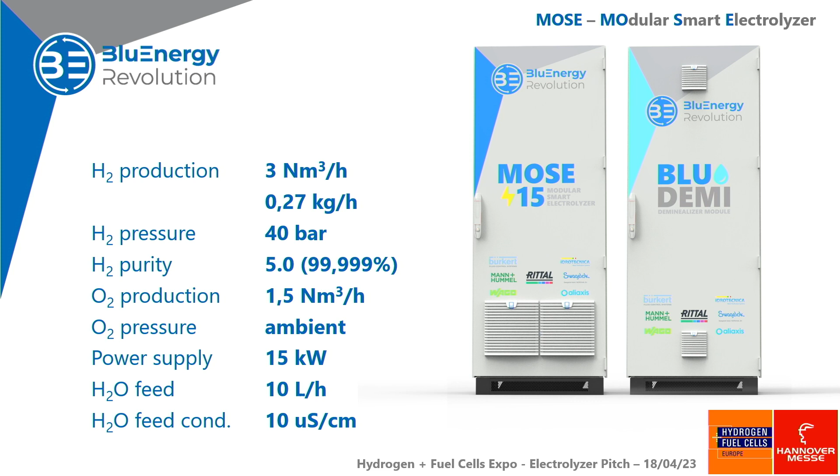So here you see our system. This is a very compact electrolyzer. It is a PEM electrolyzer, 40 bar of hydrogen pressure, slightly less than 0.3 kilograms per hour of production, and of course, pure hydrogen, 5.0, 99.999% purity. It comes out of our experience as system integrators. We dealt with projects in hydrogen generation, we gathered that experience and we came out with a product.

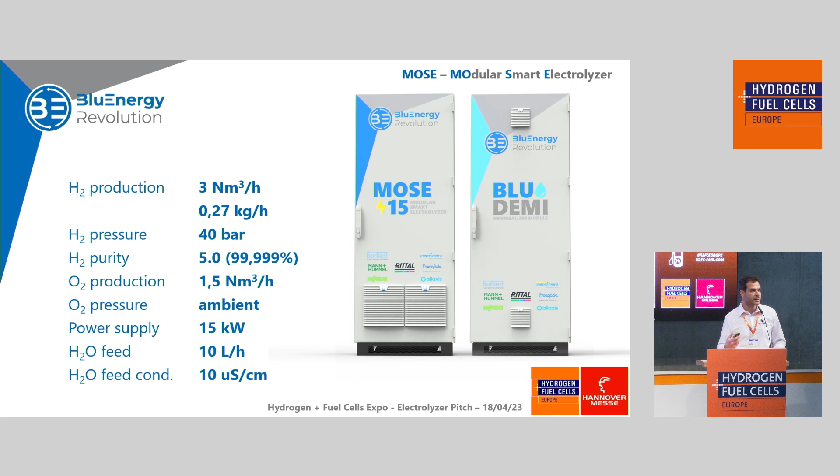Along with our MOSE, we have our Blu Demi, which is a demineralization unit. It serves to feed the electrolyzer with demi water. To make hydrogen, you need water. You split water and you make hydrogen.

Here is the concept of modularity. Mo stands for modular, okay? So you can couple electrolyzers one next to each other, combine gas flows, combine hydrogen delivery, and have one bigger electrolyzer. The range is from 15 to 75 kilowatt, from 3 to 15 normal cubic meters per hour of hydrogen production. If you want to go bigger, this product is not for you.

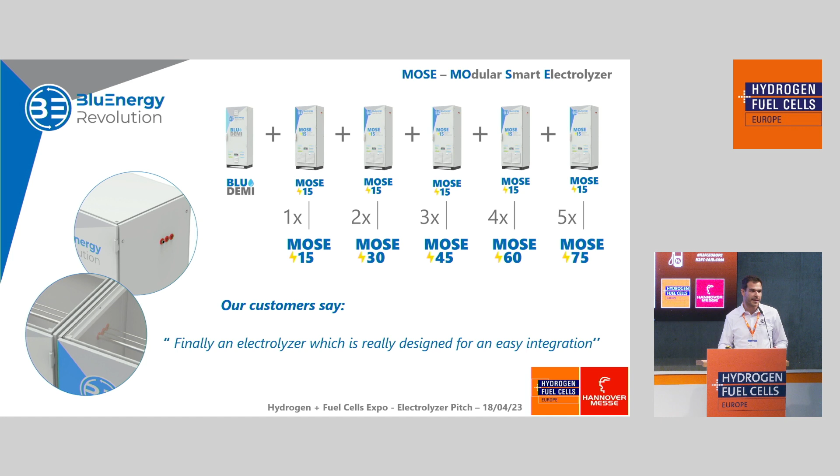We target a specific size, this small size, for many applications, from industrial to residential ones. Here you see how they couple to each other. You will have one single hydrogen delivery, vent from the electrolyzers, and our products are designed to be maintenance friendly, easy to integrate, easy to connect, and simple to maintain.

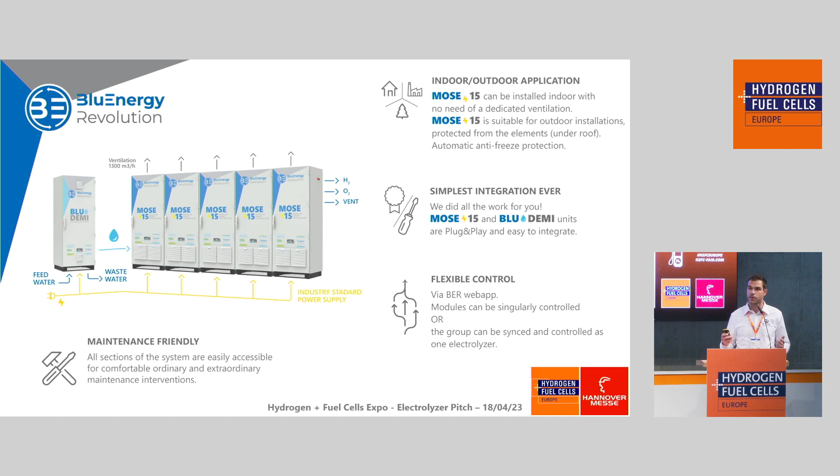Flexible control, S stands for smart. So we control it by web app, and we can control the system by remote, fully by remote, and gather the data. Here you see we collect all the data, and we provide the customer predictive maintenance. That's our idea, to serve our customers with our experience in hydrogen technologies.

We shine with components, so our experience is in the selection of components, not in the design of the technology. We are not the manufacturers of the stack. What we put together is a custom product, competitive, and very compact and safe.

Here you can see some of the names of the industrial partners who supported us with high quality components. We are newcomers. How can we prove to you that our product is a good product with high quality components?

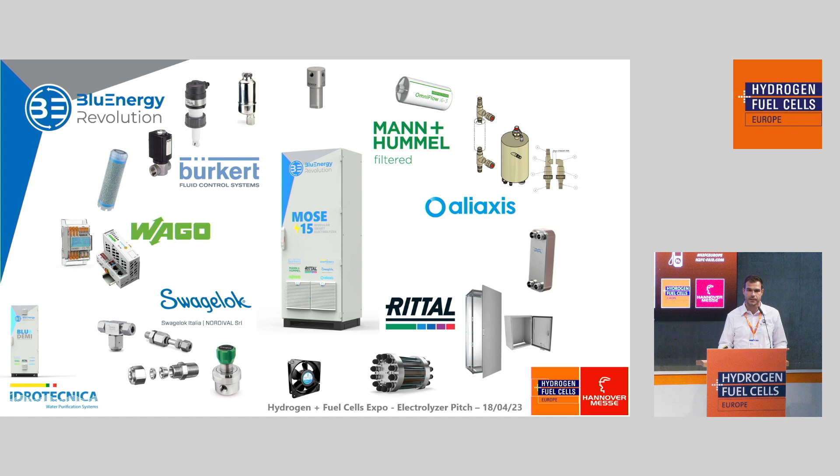Please visit us at stand D37, just right there, to view with your own eyes our product. And please let me thank our partners for supporting us at this fair at Hannover Messe.

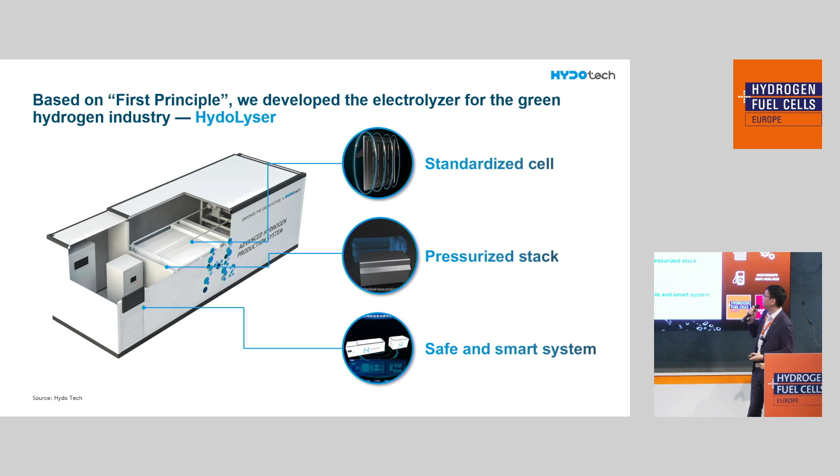And also at the system level, we make it smart and safe. So what does that mean?

By standardizing the cell, you can see this is a real picture from one of our projects. It's totally different from other products, which are round shaped. We do it in a rectangle shape, and we redesigned each cell and optimized it to the upper limit of efficiency, safety, and intelligence, so that it's very easy to scale up because they are all the same.

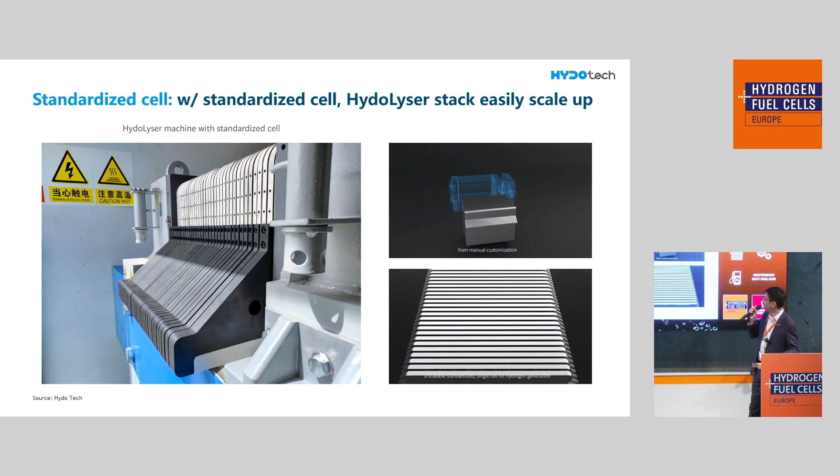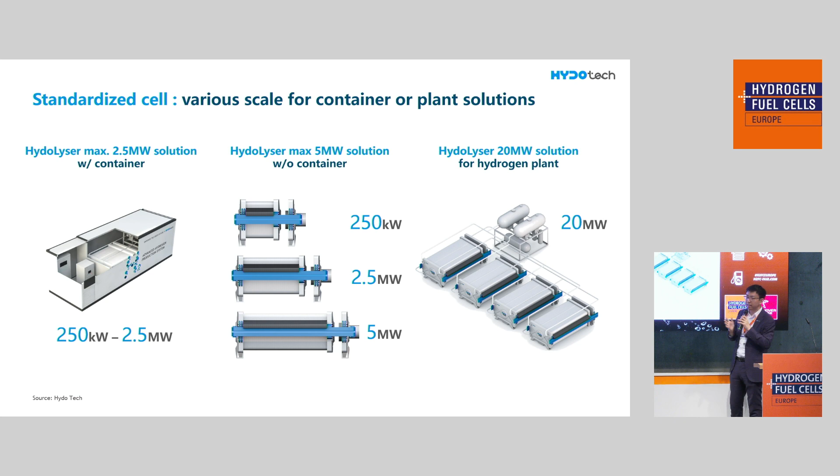So not only for containers, but also without containers or even at plant level, we can easily scale up with exactly the same cells. This is the cell level. By standardizing it, it will be very cost effective when we go to massive production. This is how we see the cell level.

At the stack level, we see the alkaline electrolyzer can be categorized in two dimensions. The first is whether it's standardized or customized, which I already discussed. The other dimension is whether it's pressurized. Why do we want pressurized?

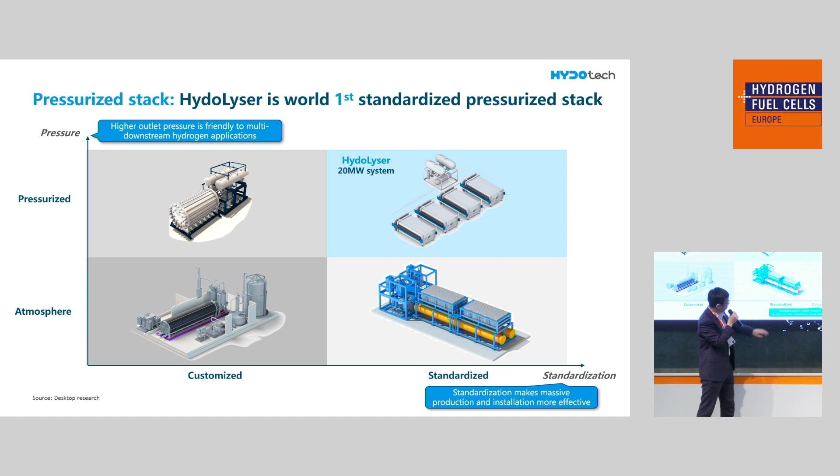It's because pressurized will be more beneficial for downstream applications. We are basically the only one doing standardized and pressurized alkaline electrolyzers now. It's already used in several downstream applications.

For example, what I mentioned, distributed energy systems, it's already in operation. And also in transportation systems, fuel cell vehicles need very high pressure hydrogen. So our pressurized electrolyzer output could already save one or two compressors for our end customers.

It's also very user-friendly to the chemical industry. As we know, the chemical industry has massive plants consuming tons of hydrogen a day. Our product, our solution, will provide pressurized hydrogen that can be directly used for them to produce ammonia. This is already being built and will be in operation by next year.

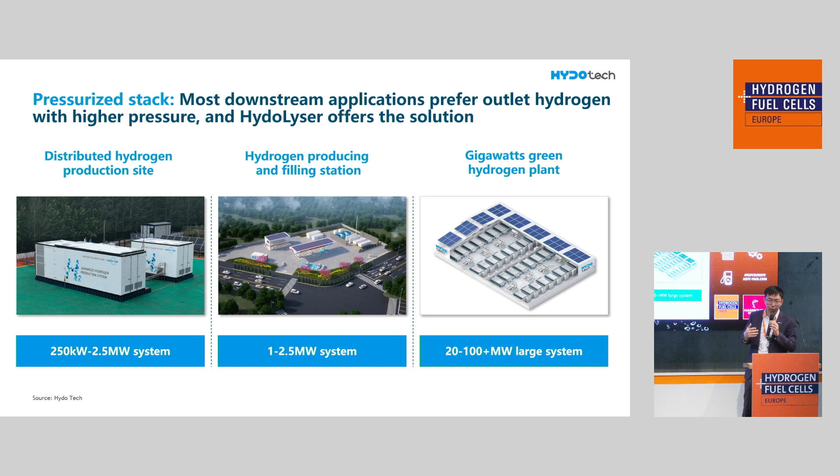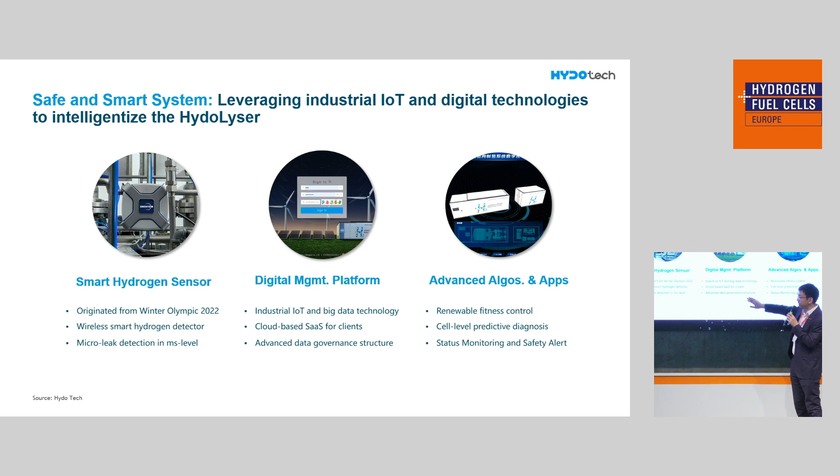And last but not least, the system: safe and smart, I won't discuss more. Basically, we've added intelligent sensors, digital management, and advanced algorithms to ensure our system is able to better fit the green electricity, the renewable electricity, regardless of its unsteadiness during operation.

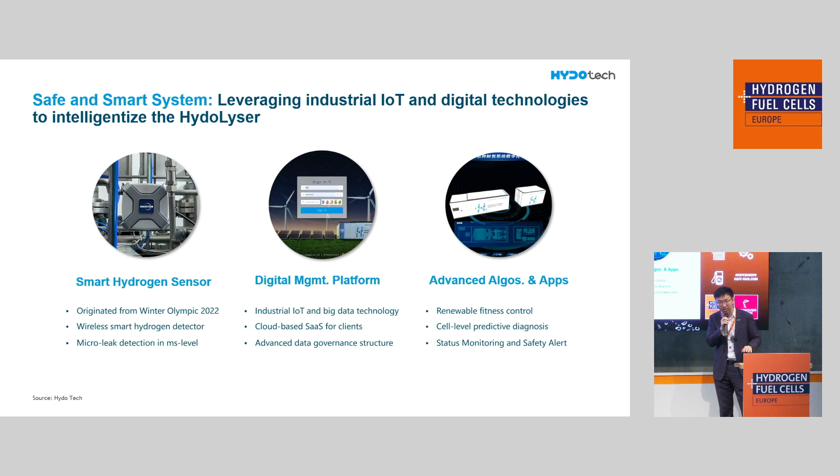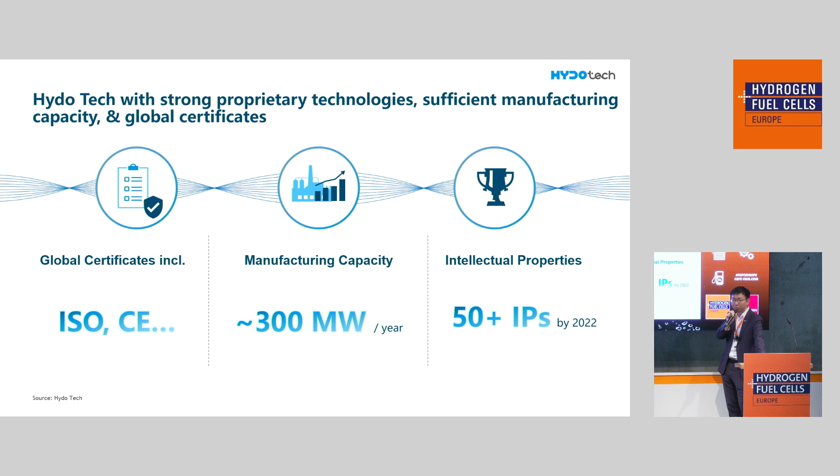So that's all about our product. About our company, we are already very ready to launch into the global market, from the certification level, our manufacturing capacity, and all the key technologies I mentioned. We fully own our own intellectual properties.

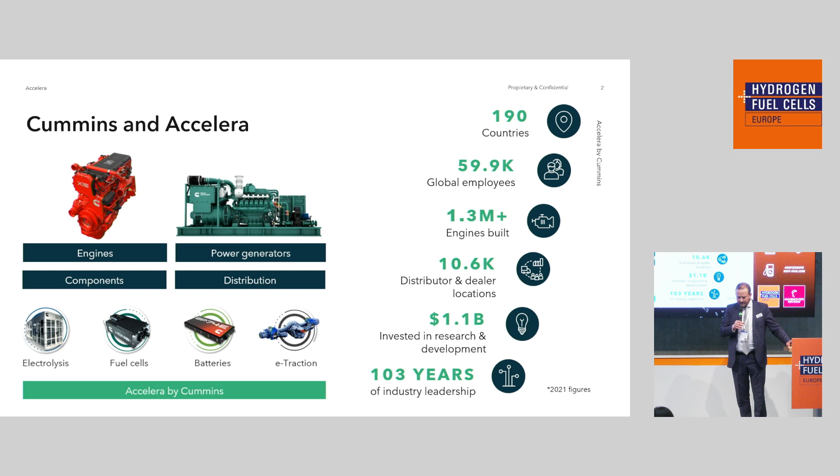In terms of electrolyzer offering, we've been in that space for more than 70 years through the acquisition of Hydrogenics, which was done in 2019. And here is our current product offering.

So we have a mix of products between alkaline and PEM technology. We use alkaline mainly for small-scale systems, so containerized solutions with all the balance of plant directly attached to the product - that's a plug-and-play type of system. And then when we start above like 2 megawatts, we offer a containerized PEM system, which is based on a cell stack of 1.25 megawatts of input power.

That's an indoor product that needs to be integrated by EPC companies, integrators, etc. And so in that case, we have developed the HyLYZER 1000, for which we already have a unit in operation for more than 2 years in Canada at the site of Air Liquide, where the hydrogen is being liquefied for industrial customers. There we use a stack of 2.5 megawatts.

We are releasing this year the HyLYZER 5000, which is a 25 megawatt building block, again using this 2.5 megawatt cell stack. We have secured a first project in Canada in the size of 90 megawatts with that project, which will be delivered in 2025.

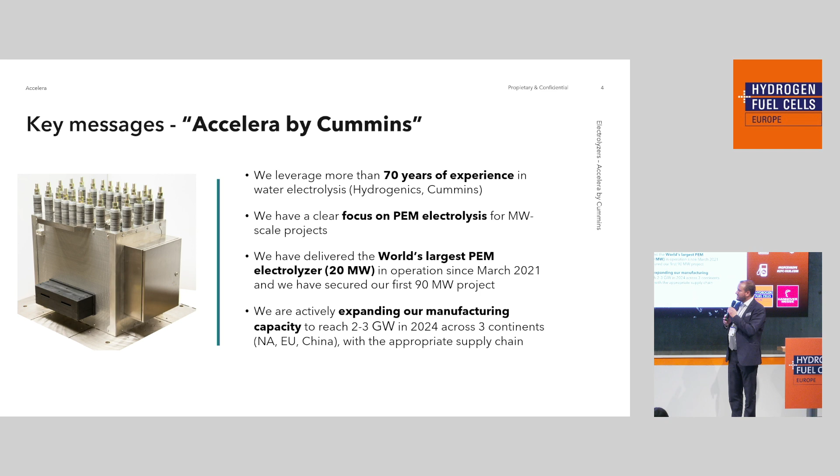And we had the pleasure to host President Biden in one of our factories in the US 2 weeks ago, and I hope my presentation was interesting for you. Thank you very much.

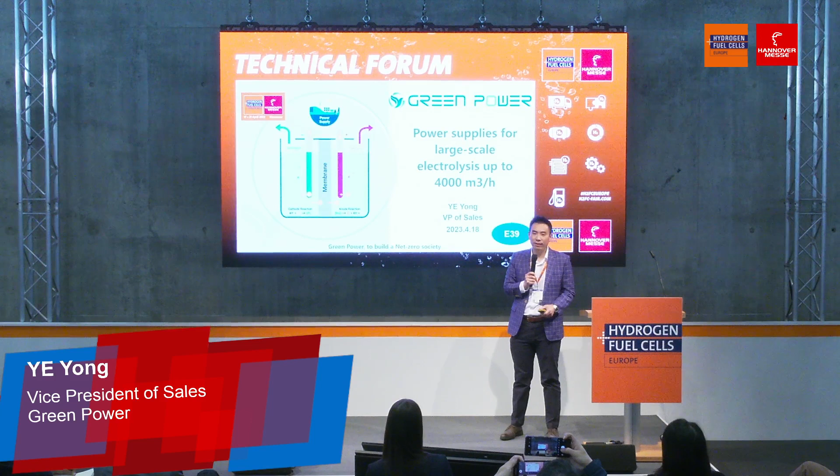I'm Yong from Green Power, a manufacturer of electrolyzers and a system integrator of green hydrogen production. I'm so excited to be here today because we have been here since 2019, but today we finally made it.

Today we are here to talk about green hydrogen, and when we talk about the future of green hydrogen, we have to consider the cost of producing green hydrogen versus other hydrogen, black, grey, or blue, etc. So every penny counts.

People are concerned about the cost of electrolyzers, of course. But if we look at this picture, if we look at the whole process, we should not ignore the efficiency of the power supply, which directly determines how much power generated will be used to produce hydrogen.

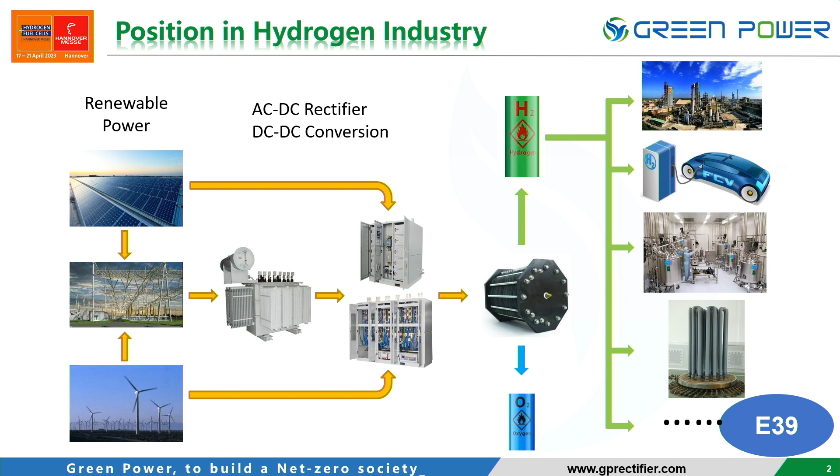Just for example, if you are running a 1,000 cubic meter per hour or 5 megawatt electrolyzer, just 1% reduction in the efficiency of the power supply unit will cost you an actual 24,000 euro each year. That's a brand new Audi Q2 SUV. What if you are running a 50 megawatt plant? That's a lot of money.

Depending on the source of electricity, different kinds of power supply units are used. Typically, solar power and wind power will be transmitted through the grid, which is also the simplest scenario. An AC/DC rectifier can handle the job.

Nowadays, the end user prefers to connect the solar and the electrolyzer directly, or the wind and the electrolyzer directly. So a DC-DC converter or an AC/DC without the transformer will be used.

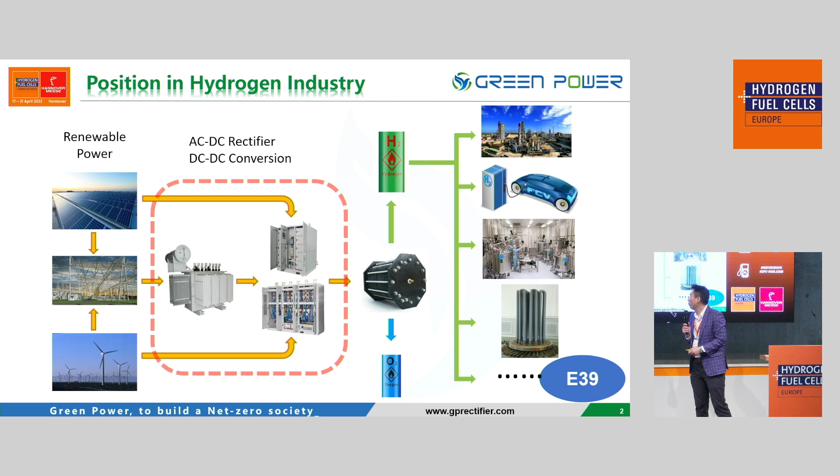And under a more complex scenario, when using multiple energy sources, such as combining solar and grid, or even solar, wind, and grid, an integrated power system will be used.

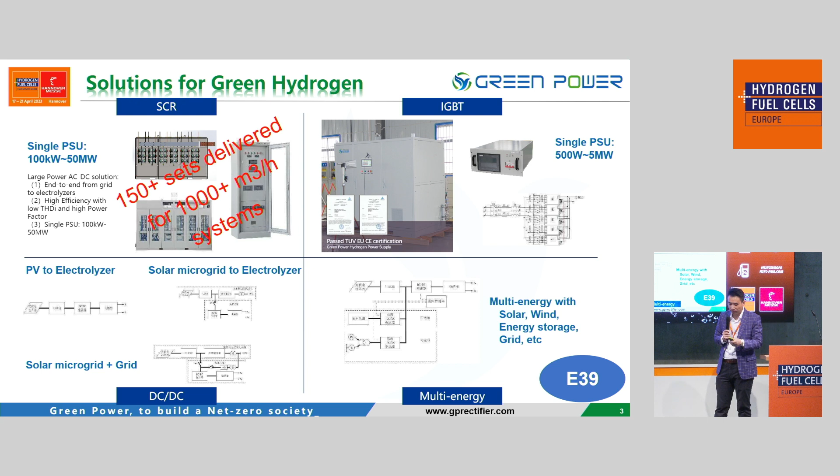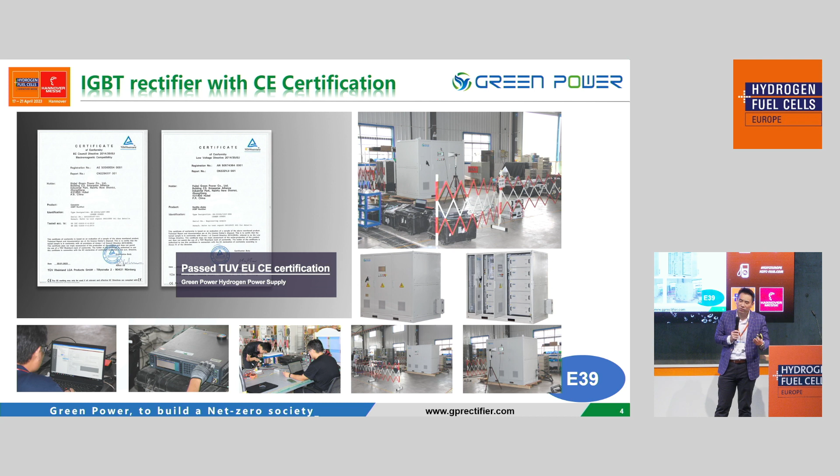In addition to different types of power supply units, there are a lot of other parameters which will affect the total cost of the power supply unit, such as the efficiency, power factor, total harmonic distortion, current ripple, etc. And in most cases, the end user has a very limited space for the PSU, so the size matters.

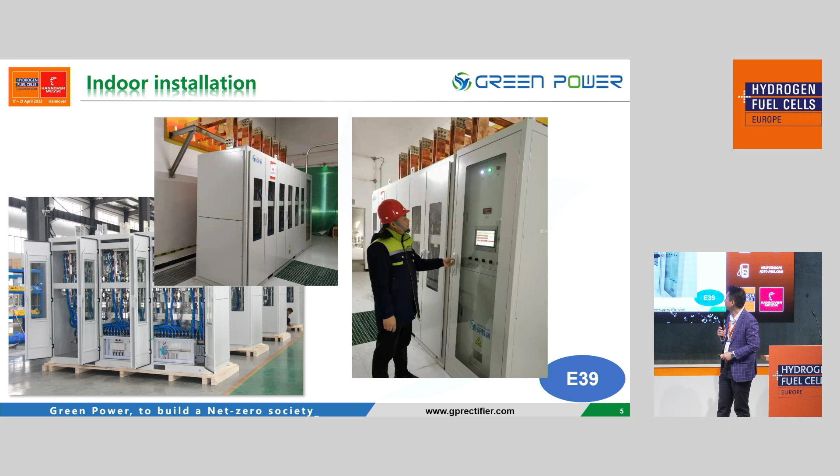Well, it's very difficult to complete optimization of the power supply system in 3 minutes. So welcome to our stand, we can have an in-depth discussion there. That's E39. Thank you, I'm Yong from Green Power.

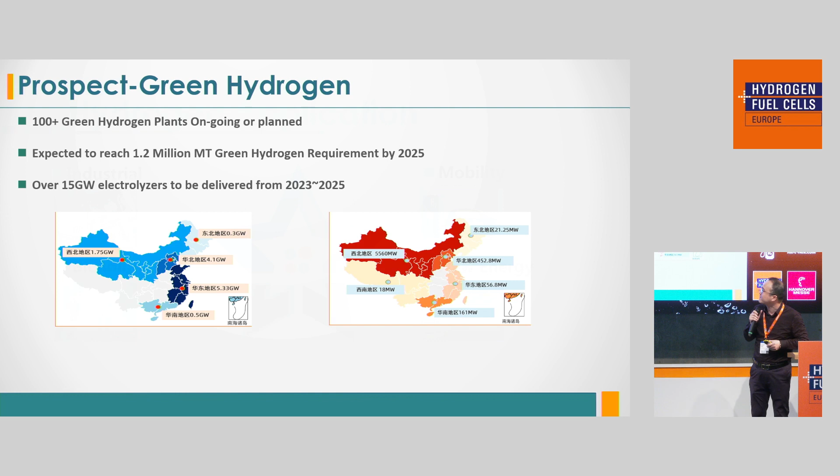Of course, this green hydrogen generated will be applied in various applications like industrial, blending with natural gas, mobility, and most important, as an element of energy storage related to renewable power.

So who are we? We are a manufacturer and a total solution provider specialized in green hydrogen. Not only in the hydrogen industry, we're also capable of providing our green nitrogen solution to collaborate with green hydrogen for green ammonia generation. We have our business sales footprint across the world, and we hope to have our first jointly developed stack installed in Germany soon, this August.

So we are capable of providing different solutions for hydrogen generation, including alkaline, PEM, SOEC, and AEM. Currently we have our alkaline and PEM on stream, and I hope our team's work on SOEC and AEM will come in a very short time.

We are specialized in the alkaline electrolyzer with a range from 2.5 kilowatts to 5 megawatts single stack with the latest technology, adding value for customers through high efficiency and low power consumption, and with a modular and compact design for the balance of plant. More important, we have in-house fabrication with 4 lines for the bipolar plates, which ensures in-time delivery of the system for our customers.

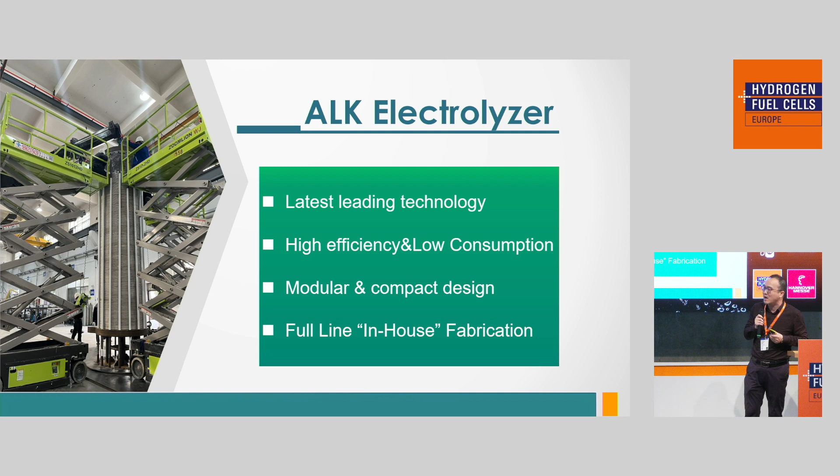For PEM electrolyzers, our team has done a great job with the new type ordered MEA, which can increase the electrolysis efficiency as well as the lifetime of the stack, and a unique micro-hole diffusion layer, which has less requirement of the CCM. The PVD catalyst sputtering technology precisely controls the catalyst usage and dramatically saves the amount of catalyst, which is a very key element of the cost.

We have our existing plants delivered around the world, and we have references in Europe, in the Netherlands, in Bulgaria, and in Italy soon. We will have our R&D center in Italy in a very short time.

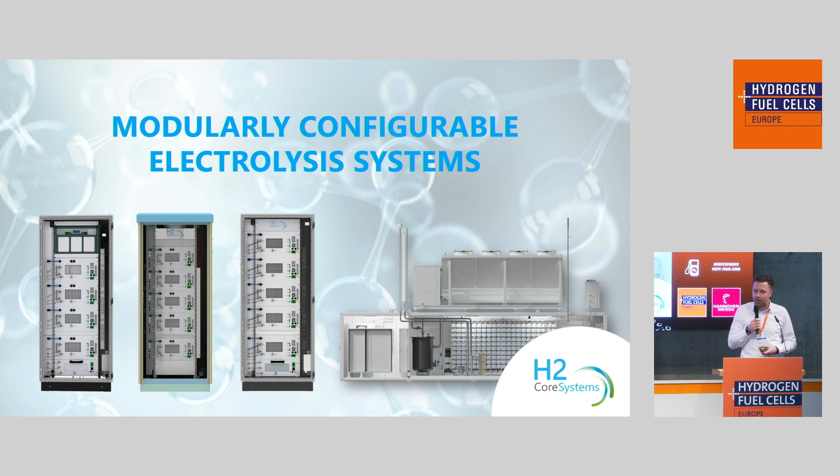The main goal we want to achieve is speeding up energy transition. This is our heartfelt goal, and we are completely convinced that we can only do it by teaming up with partners globally. That's why we, as a relatively small startup that started 2.5 years ago, already realized more than 200 hydrogen projects in more than 40 countries all over the world, teaming up with global partnerships.

So, it's very slow, but it's hopefully working. Next slide should be coming in a few seconds.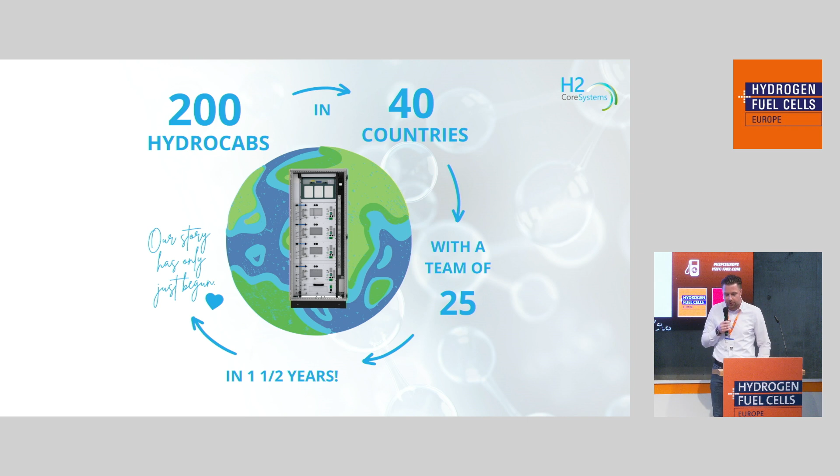Only with those partners can we realize global projects in a very quick manner, because we see ourselves as a workshop for our global engineering partners or our local partners who take care of the customer needs, and we produce in series the systems they need for their projects. In this way of working, we see a huge advantage to speed up energy transition, because everybody can concentrate on his own priorities and doesn't need to build up a whole complete production process on his own. But his knowledge about the local markets is needed, and that's what we can deliver.

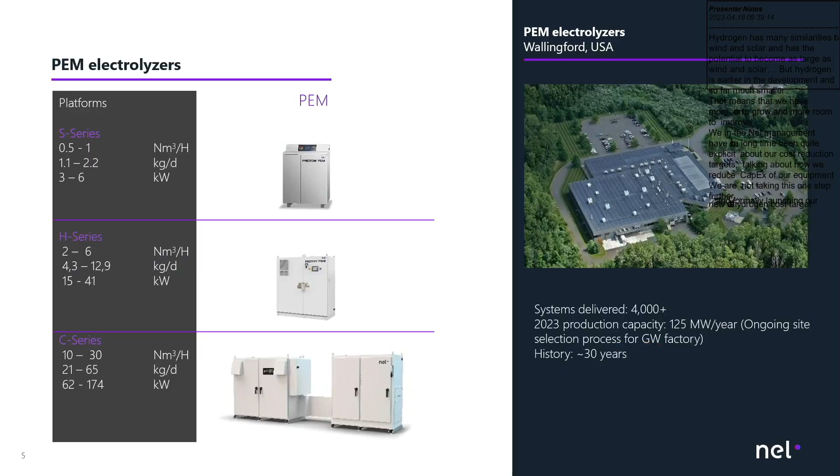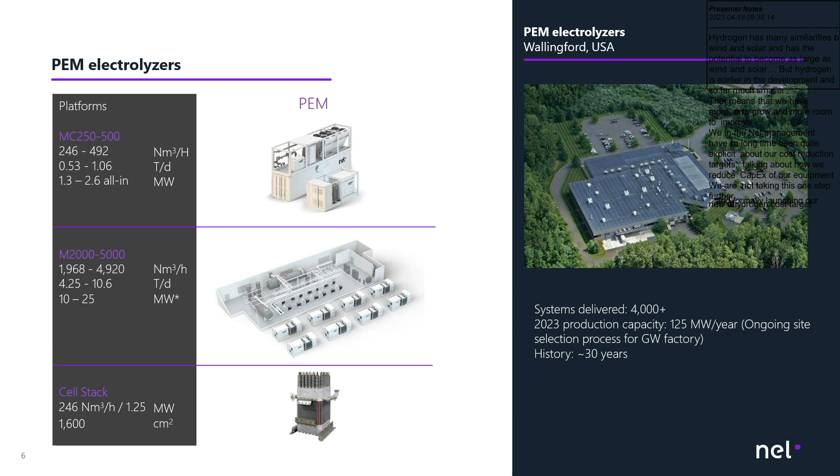So, there we go. What you're seeing here is our PEM electrolyzers. Normally at Nel, we are talking about alkaline gigawatt projects. But the PEM electrolyzer is also changing now. It's getting more efficient, it's very reliable, and it's also very competitive.

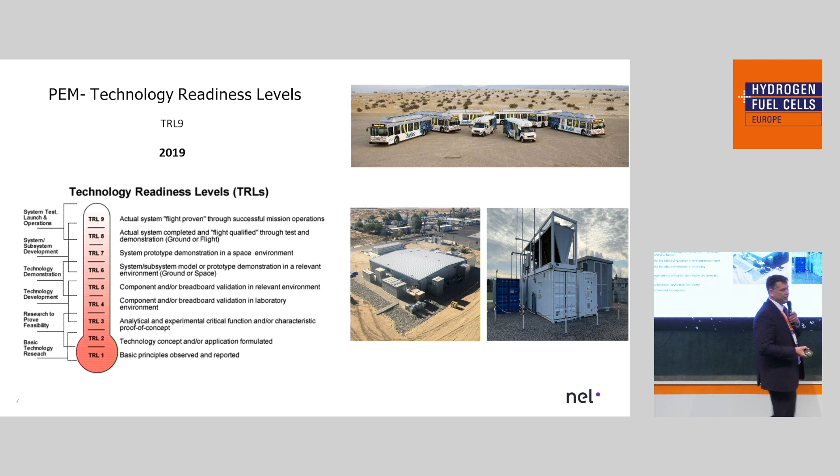Where we are with the development, TRL9 for the PEM electrolyzer was 2019. But this is not the most important. This is the journey. How do we actually come to this figure? How are we ready for this technology? And how can we secure your investment? I just want to open up a little bit about the journey.

The stack and the membrane we are using today, we started testing that in 2003 with real tests. And we found out the stack was not performing well. So we developed a new stack, tested that in 2005, and after 40,000 hours of real testing, we concluded 0 degradation. Degradation is not something people want to talk so much about, but we are very proud of this result. And we have also collected a lot of hours.

The question we always get: alkaline is better, it's more reliable and it has a long lifetime. But today, the PEM electrolyzer can actually run up to 85,000 hours. And we have an electrolyzer in the market that has reached it at 30 bar, with minimum degradation.

How do we scale it up? Because this is proven technology, and now we want to go into the 100 megawatt projects. So we signed an agreement with GM to reduce our price and increase the quality further. And the result of that is now we are on the map. Everybody is talking about the $2 per kilo of hydrogen, and we are actually there.

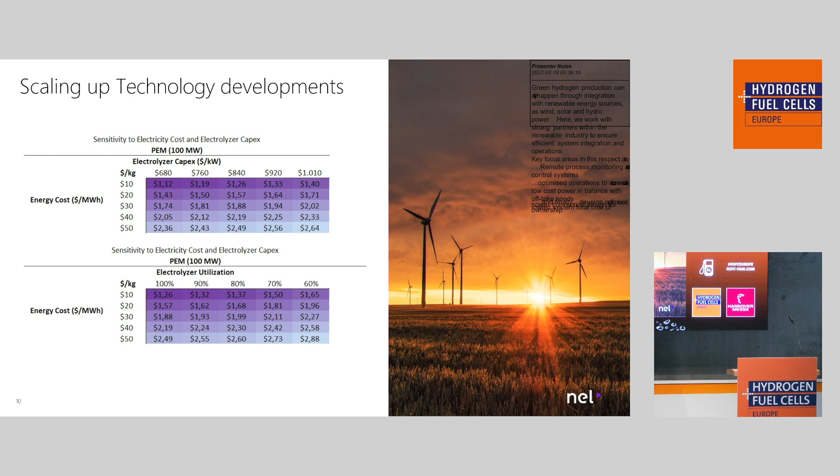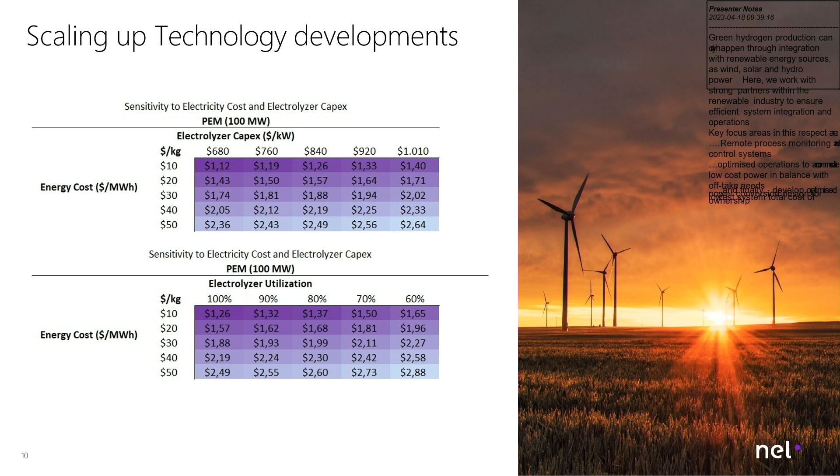What I have tried to do is to make a matrix where we have the energy price from wind farms, PV, hydro, and then we have your capital investment. So we are very proud to say the PEM technology belongs in the 100 megawatts, and we are below the $2 per kilo.

The most important thing is safety and reliability. Because if you don't prioritize these two things, you don't have a good project. So safety and reliability, then efficiency, and then the price, not the other way around. So both technologies are proven, and they have their benefits in green hydrogen.

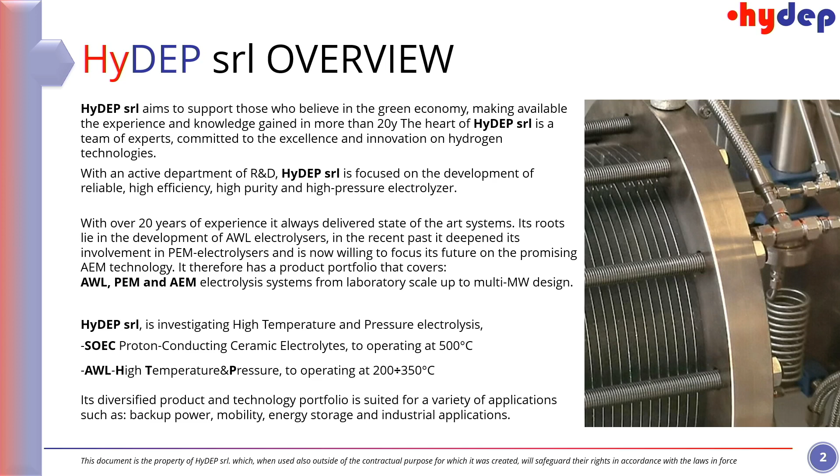Do you hear me? Yeah. I'm Mario Dragoni. I'm the CTO of HYDEP. HYDEP is a company we founded more or less 24 years back. We are specialized in design of the BOP, design of the stack, and design also of the plant. So now we are looking to improve our experience in new projects. The target is reducing the cost.

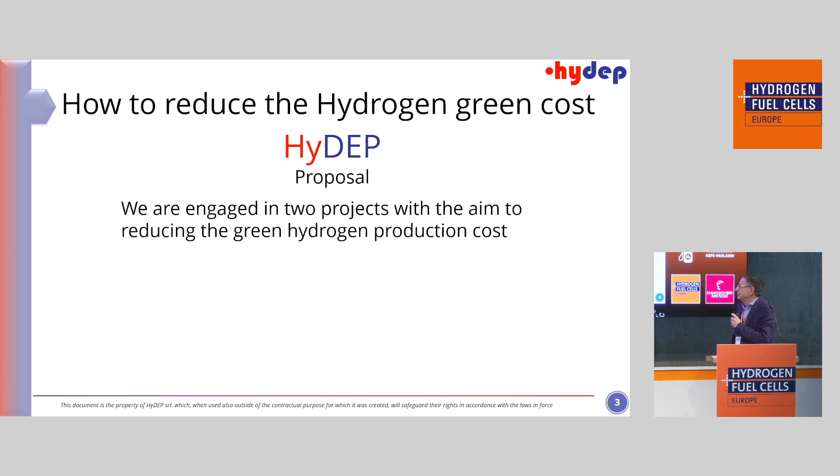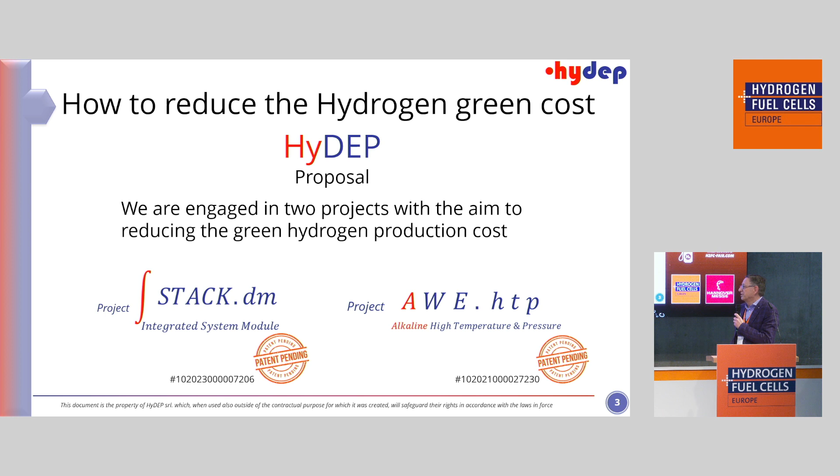Our approach is a little bit different than the market. We are looking to reduce the cost by integrating system modules. This is a new approach, and we are waiting for the patent in the coming months. And the next is the alkaline water electrolyzer, high temperature and pressure. These are two ways to save money.

Generally speaking, the cost for production is more or less 70% in power, 20% in CapEx and 10% in OpEx. And our proposal is to reduce the cost in CapEx, integrating in the stack many functions we have around the stack.

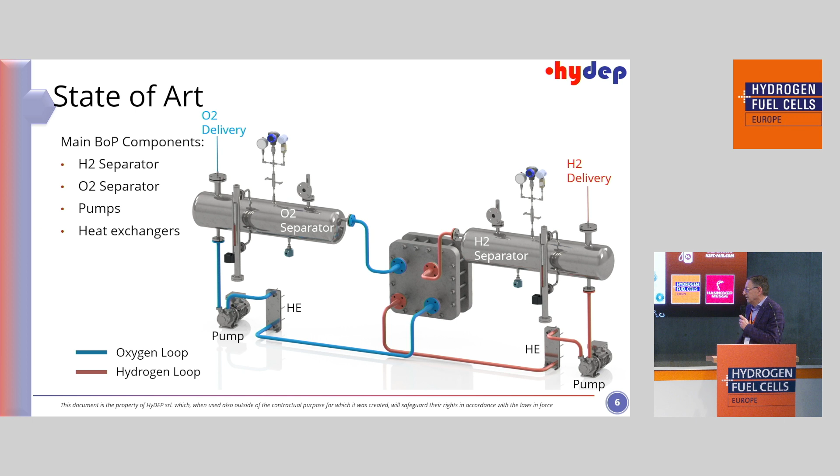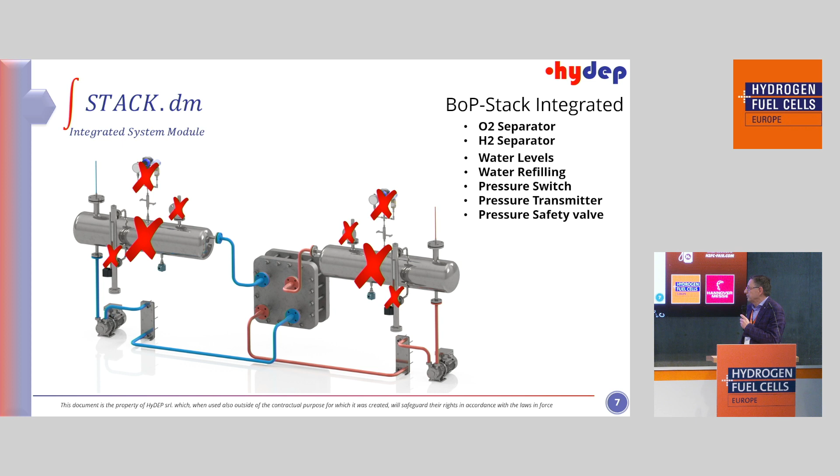For example, all the separators and sensors like this. This is what we want to do: eliminate the separator, eliminate the water level, refilling, pressure switch, pressure transmitter, safety valves, and temperature transmitter. So this is the result. You can see the prototype in our booth.

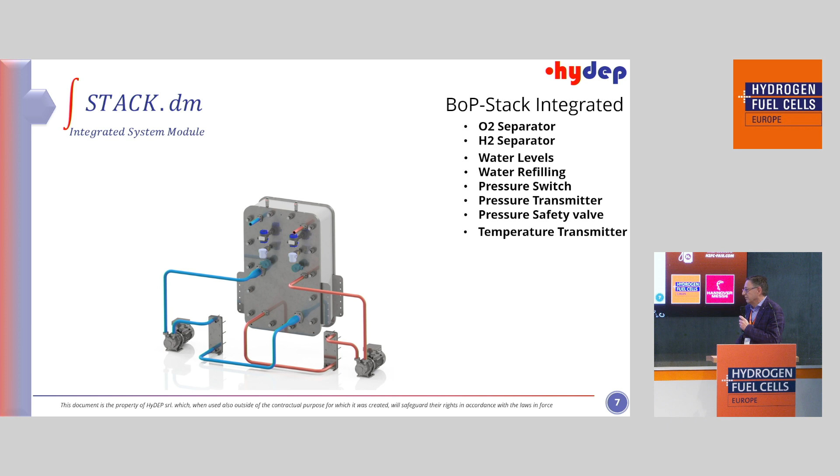We are maintaining the external pumps and the heat exchanger. The reason is very simple to understand. If we have natural circulation inside, we have to wait a few hours in order to be operating. Using the pumps and heat exchanger, we can be very fast. In our simulation, the result was 10 minutes to reach the operating condition.

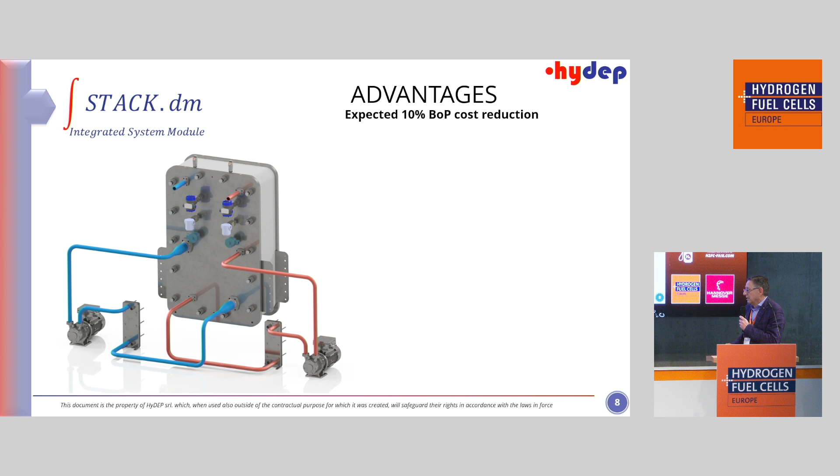Okay? So the advantage is we save, at the moment, more or less 10% of BOP cost because we don't need a separator. Of course, we need to maintain the sensors to manage everything. And we go fast because we don't need a long time, okay? But we have an internal separator, safety valve, and the footprint is very reduced, so we can also save space, and that's a cost.

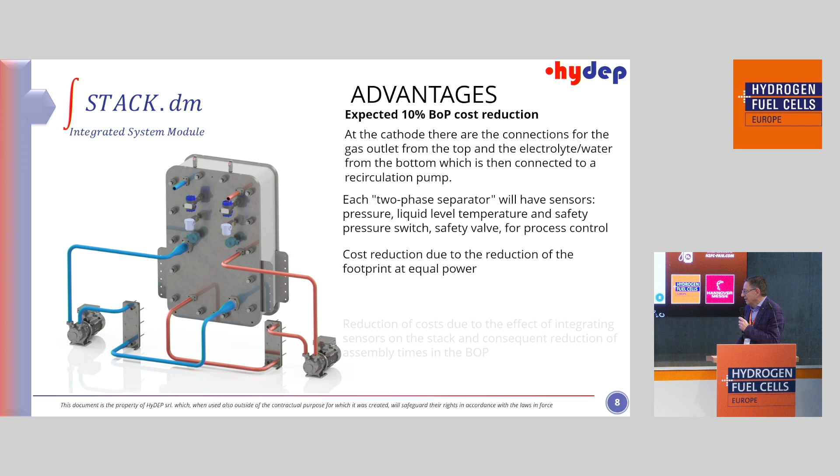Cost reduction per stack. The second point is energy. Energy is very important because it's the main cost. We showed before 70% of the cost of hydrogen production is energy, power. So our approach is to use temperature to reduce the cost. For this reason, we have a project, alkaline water electrolyzer, high temperature and pressure. It's not SOEC. It's completely different.

We are not using the steam flowing directly in contact with a ceramic electrode, but we are using the steam only to warm the KOH solution, and we need the pressure to maintain the KOH liquid. So this is a very important approach for us.

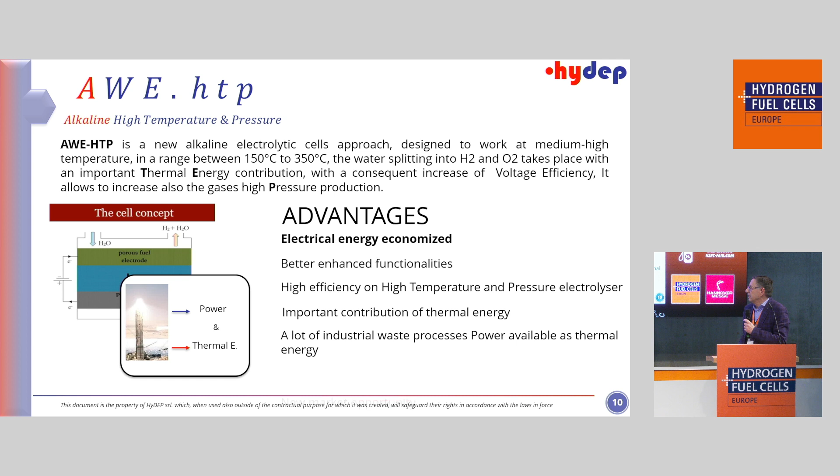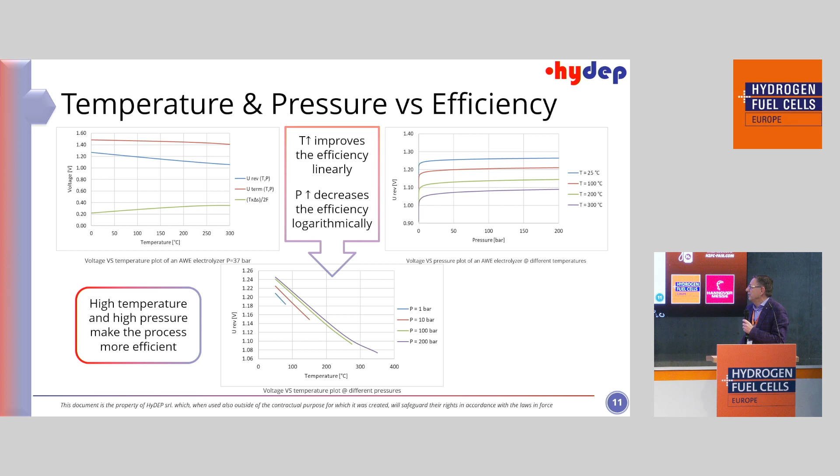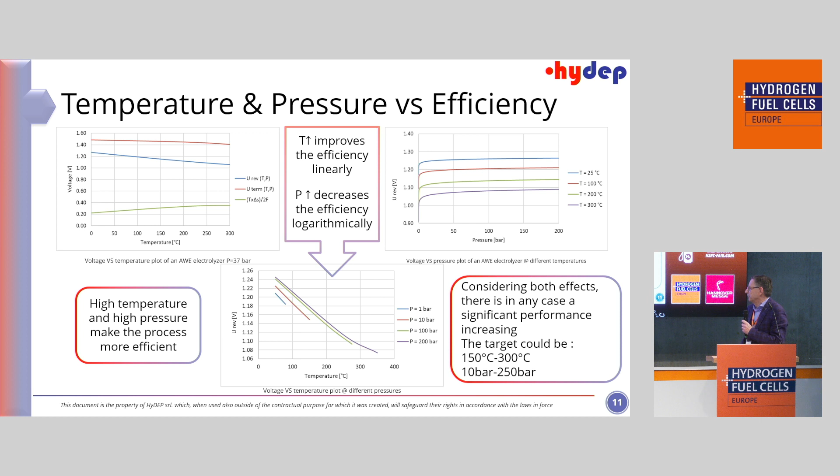We can show the advantage. This is a curve where we show the efficiency of the electrolyzer increases because we're reducing the voltage, okay? And this is a curve of temperature as a function of pressure. High temperature and high pressure make a more efficient system. Of course, the pressure takes energy, but anyway, we have an advantage. And this is a very important point: we are operating at 150 up to 300 degrees Celsius, between 10 up to 250 bar.

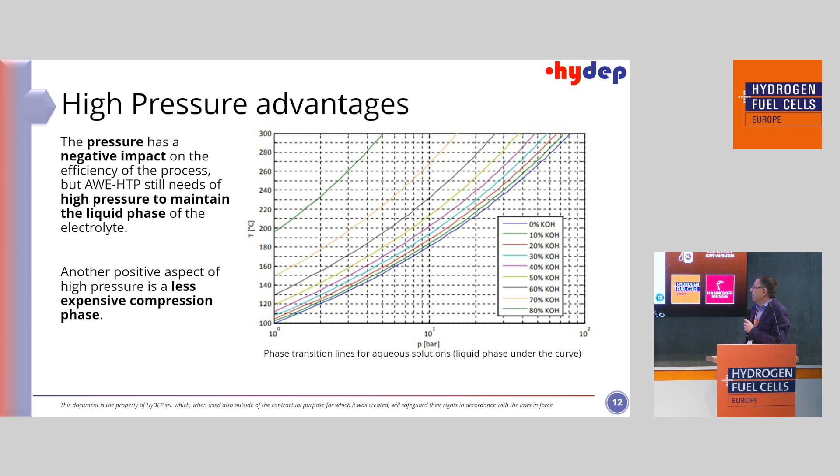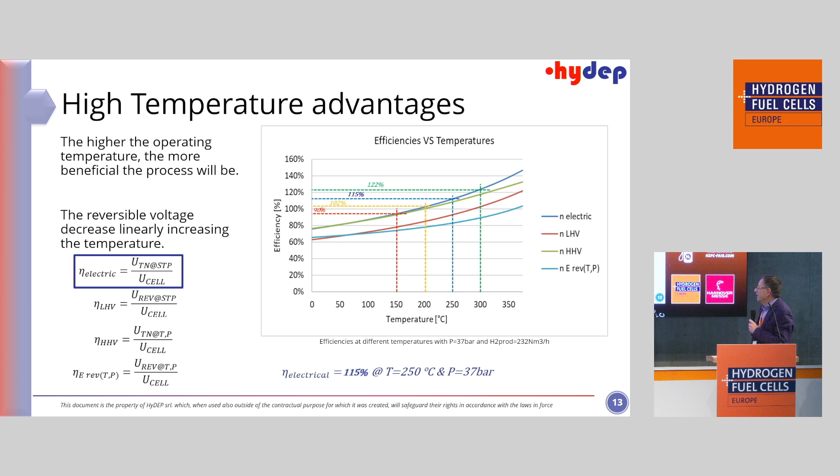Okay, this is a curve where I represented the temperature as a function of the pressure. But very important, this one. If we consider the electrical efficiency, in the case we are operating at 250 degrees Celsius and 37 bar, you can see the efficiency is 115% in voltage. Why? Because we have a thermal contribution. It's not a magic number, okay, at this condition.

So you can see we can save a lot of money, because we expect at the end of the program to save more or less 35% of electricity. Okay?

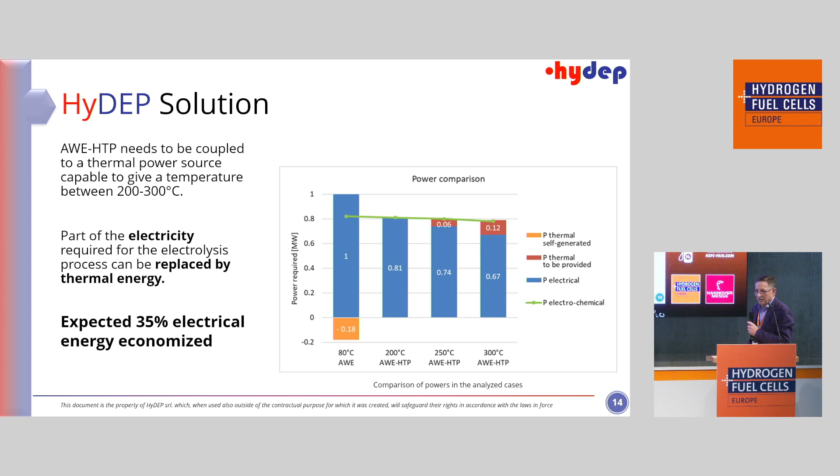Thank you. Last on our list here, unless we have Robert Müller, I believe he is not here. So last on our list, of course, is Jesper Andersen, Sales Director at Green Hydrogen. Welcome. Thank you.

We have capacity today to produce up to 400 megawatt as a total amount to the market. We have a backlog of around plus 20 megawatt on what we call the A-Series. I'll get back to that later. We do believe that the commercial momentum is on all of us that have pitched today. We're just a part of this big puzzle of decarbonizing. Also, I have to mention that we are on the Nasdaq in Copenhagen. We went IPO in 2021, which of course was the accelerator of where we are today as a supplier.

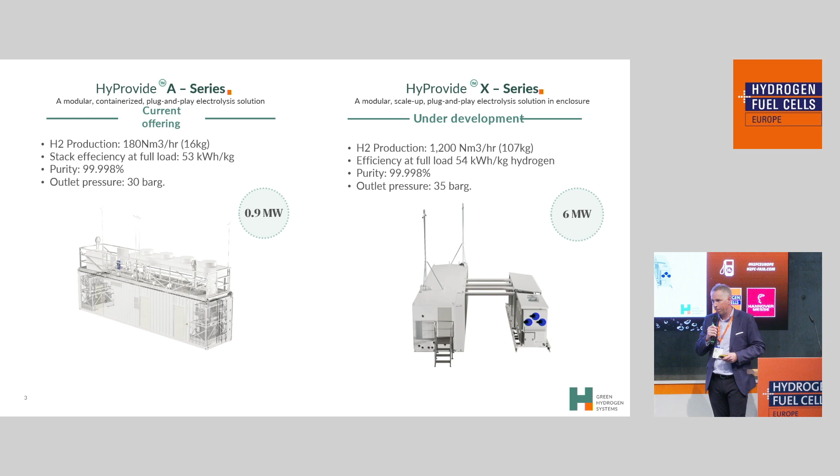As a supplier, we have tried to simplify the product we are delivering to the market. So basically, we have two products. We deviate a bit from other suppliers. We do see small electrolyzers of 1 megawatt as something we have to support for mobility and power-to-power sites across Europe. And then we see a huge market for the megawatt or eventually gigawatt scale. We are not there yet, but we have developed what we call the X-Series. It's a 6 megawatt module.

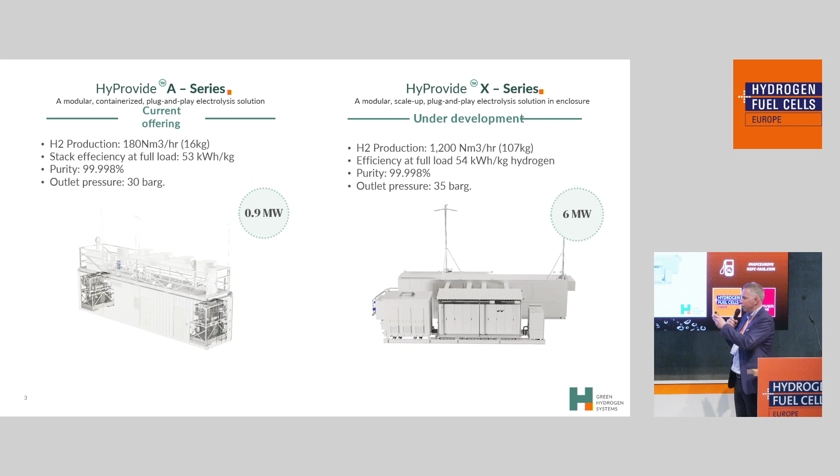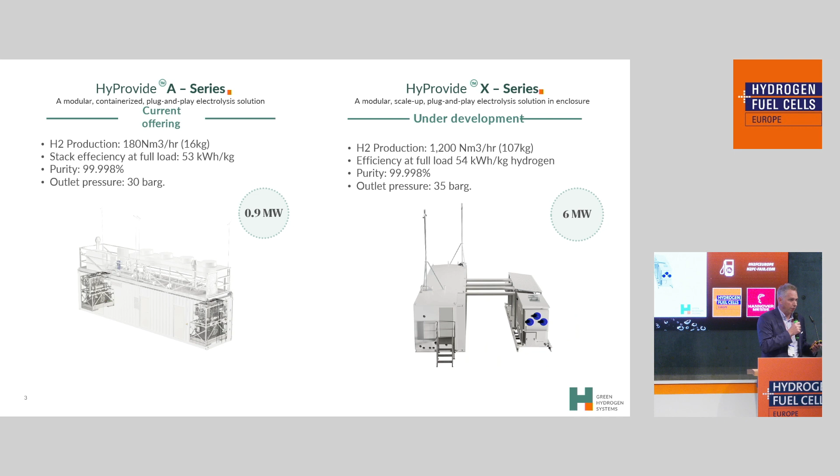Another item where we are a bit different from others is that we don't build a process plant for our customer. We have FAT-tested modules that you can place in a modularity concept, exactly to the amount of kilograms that your site is needing. The two different components you see here have different specs. The biggest advantage, as we see it, is that we have increased the output pressure, which is extremely important when you're trying to make a good business case and remove some of the capex placed in the equipment coming after the electrolyzer.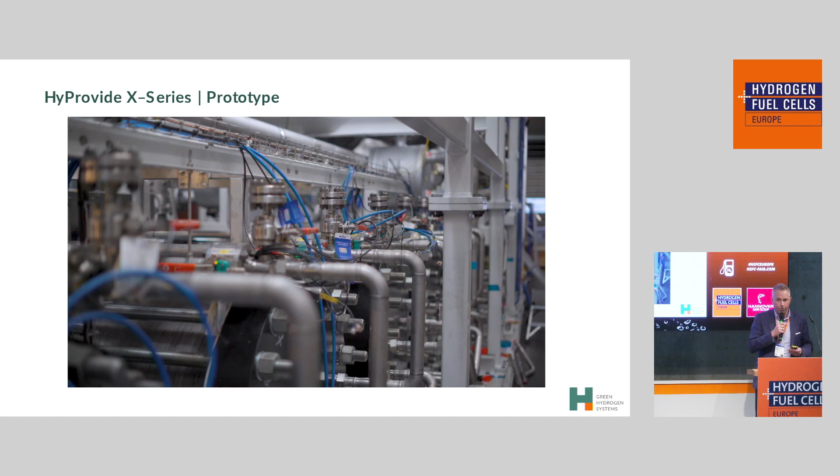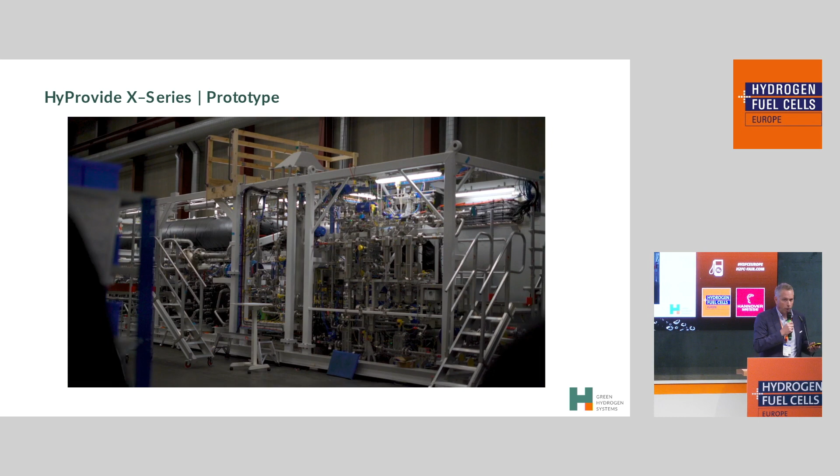I would also mention that the X-Series is not a fata morgana. We have built and delivered the first 6 megawatts to the first site in Denmark, the GreenHyScale project. It's under installation right now, and it will be commissioned quite soon. This is just the first step up to 100 megawatt under this GreenHyScale funded project. So for us, it's extremely important. To keep focus on time here, it is a prototype, and we have to acknowledge that with all the impact that will have. As written here, in Q1 we're doing the first prototype. End of '23, we will start to accelerate the sale and write commercial agreements. And at the end of '24, we will deliver the first commercial X-Series to the market.

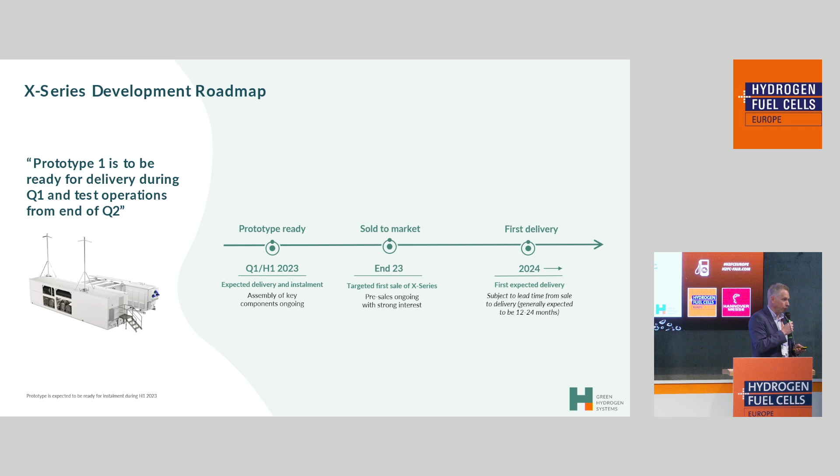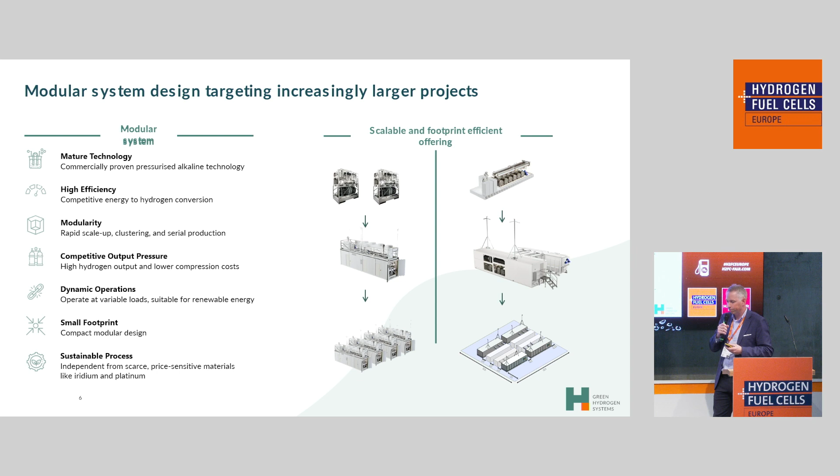As a final slide here, I would say that with the two different products, it's important that it's a modularity concept to the market. We do fulfill the guarantees the market needs to make projects bankable, because we know that we need to make it bankable if it has to be sufficient, and we need to create the momentum. That was all for me.